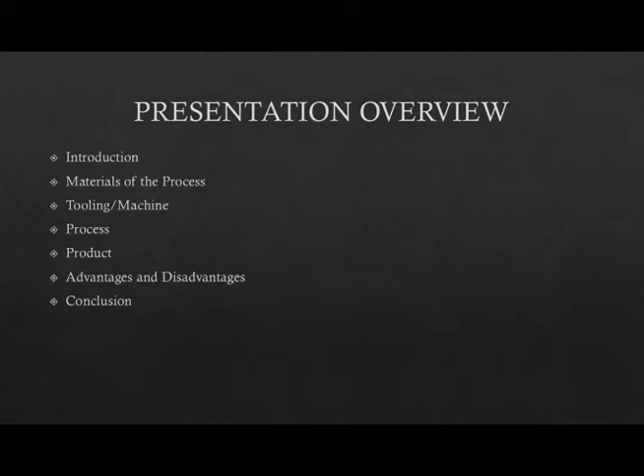So the overview of this presentation: we will start with the introduction, materials of the process, tooling or machine, process, product, advantages and disadvantages, and conclusion.

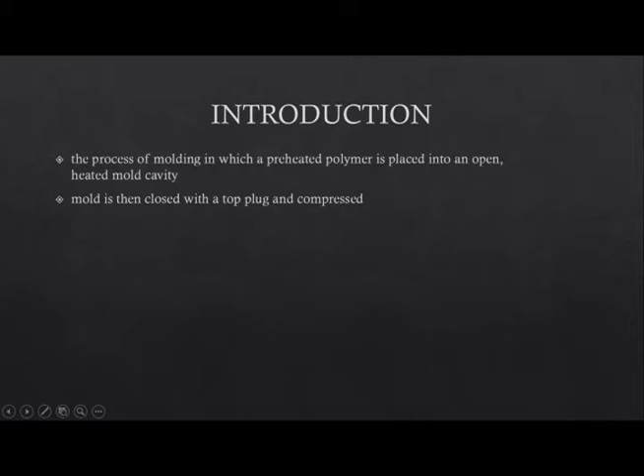Introduction. Compression molding is the process of molding in which a preheated polymer is placed into an open heated mold cavity. The mold is then closed with a top plug and compressed in order to have the material contact all areas of the mold. Compression molding is generally used for thermosetting plastics.

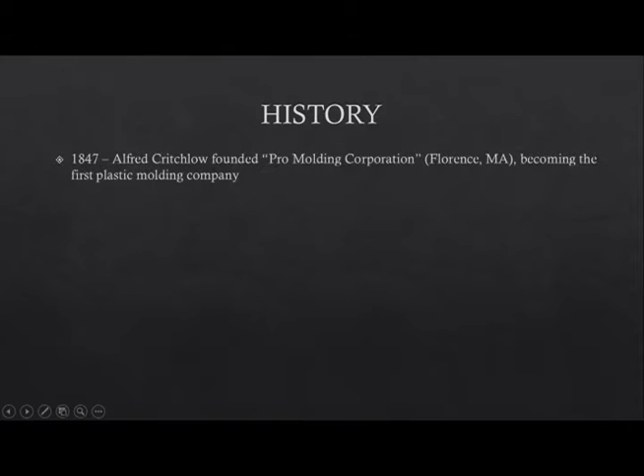Let us now discuss compression molding's history. Alfred Critchlow founded the Pro Molding Corporation in Florence, Massachusetts in 1847. Pro is thought to be the very first plastics molding company established in the United States. The very first plastic products included items such as buttons, brushes, and mirror handles that were compression molded, which are relatively small and had relatively simple geometries.

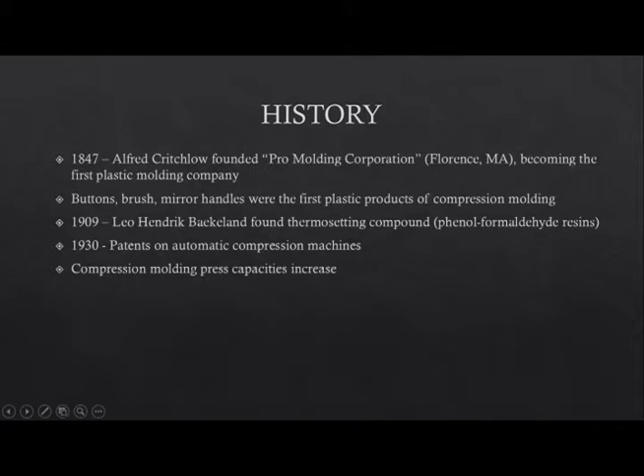In 1909, Leo Hendrik Baekeland found the thermosetting compound, the phenol formaldehyde resins. Patents on automatic compression machines date back to 1930. Over the years, compression molding press capacities or sizes increased so that larger thermoplastic and thermoset plastic parts such as radio housing could be molded.

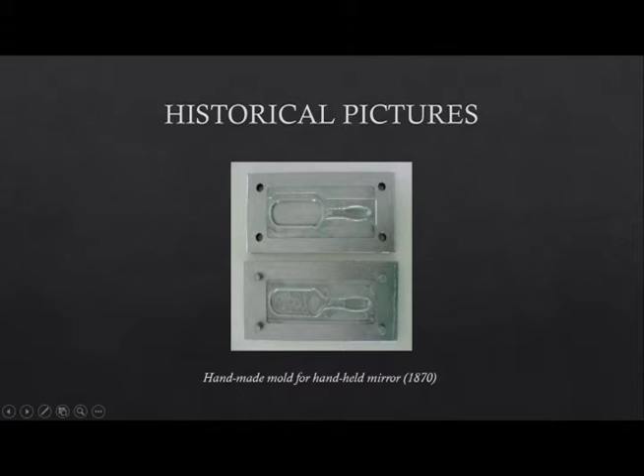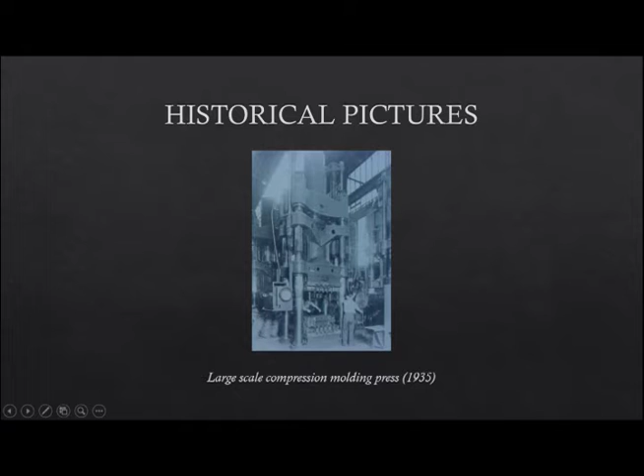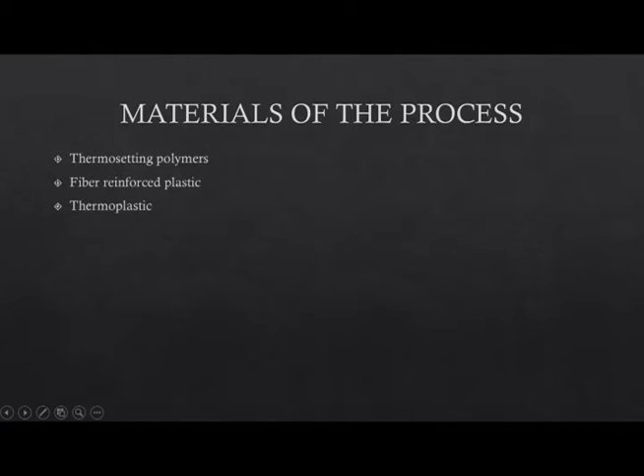What are the materials used in this process? So we have three materials: the thermosetting polymers, fiber-reinforced plastics, and the thermoplastics.

Thermosetting polymer. A thermosetting polymer, which is also known as a thermoset or thermosetting plastic, is a polymer consisting of a cross-linked structure or heavily branched molecules.

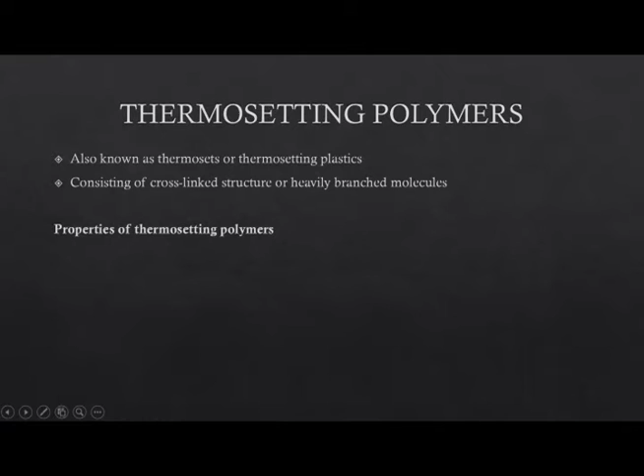The properties of thermosetting polymers. One of the main properties of thermoset plastics or polymers is that they harden during the molding process and after solidifying, they cannot be softened. Typically, when the polymers are molded and shaped, they acquire a three-dimensional cross-linked structure along with the strong covalent bonds that further help them retain their strength as well as the structure even if the temperatures are set high.

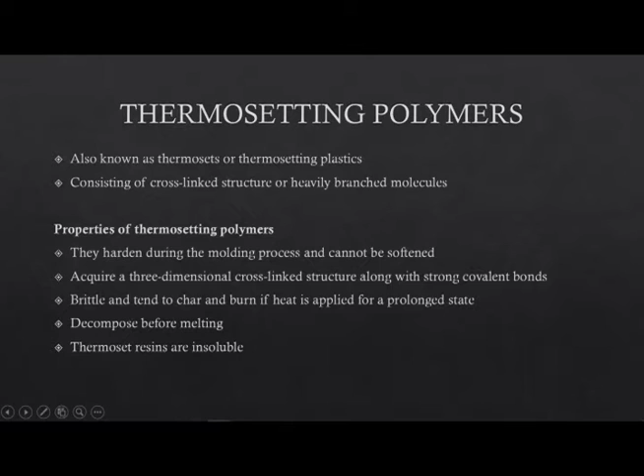However, thermoset plastics are brittle and tend to char and burn if heat is applied for a prolonged state. Normally, thermosets decompose before melting. Meanwhile, thermoset resins are insoluble in most of the inorganic solvents.

Fiber-reinforced plastic, FRP, is also known as fiber-reinforced polymer. It is a composite material made of a polymer matrix reinforced with fibers. The fibers are usually glass, carbon, basalt, or aramid, although other fibers such as paper, wood, or asbestos have sometimes been used. Properties of FRP.

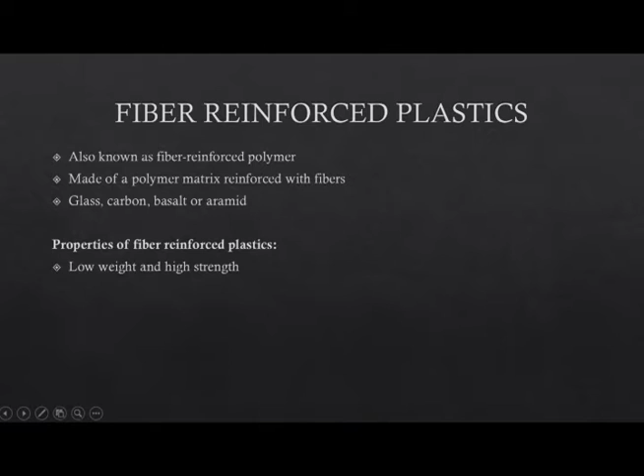These composite materials typically exhibit low weight and high strength. They are so strong that the automotive industry is increasingly interested in using them to replace some of the metal in cars. Fiber-reinforced plastics can be as strong as some metals, but they are much lighter and therefore more fuel efficient.

Fiber-reinforced polymers typically have impressive electrical and compression properties and display high-grade environmental resistance. One important factor that makes these materials a favorite among different industrial sectors is the manufacturing process, which is quite cost-effective. The rate of productivity is medium to high, and ready bonding is exhibited with similar materials.

The other exclusive properties of fiber-reinforced plastics include commendable thermal insulation, structural integrity, and fire hardness along with UV radiation stability and resistance to chemicals and other corrosive materials.

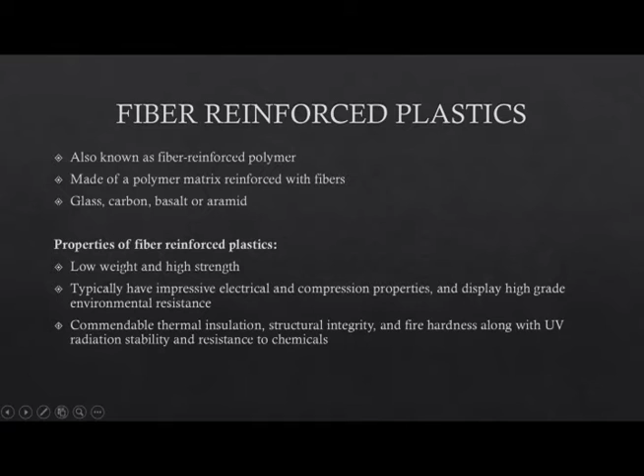The last material is the thermoplastic. A thermoplastic is a material, usually a plastic polymer, which becomes softer when heated and hard when cooled. Thermoplastic materials can be cooled and heated several times without any change in their chemical or mechanical properties.

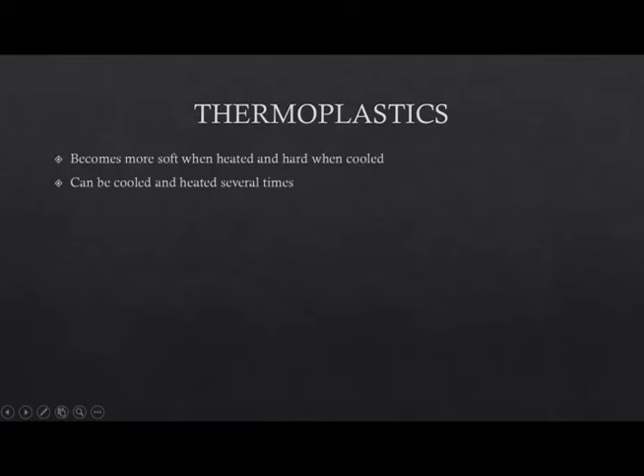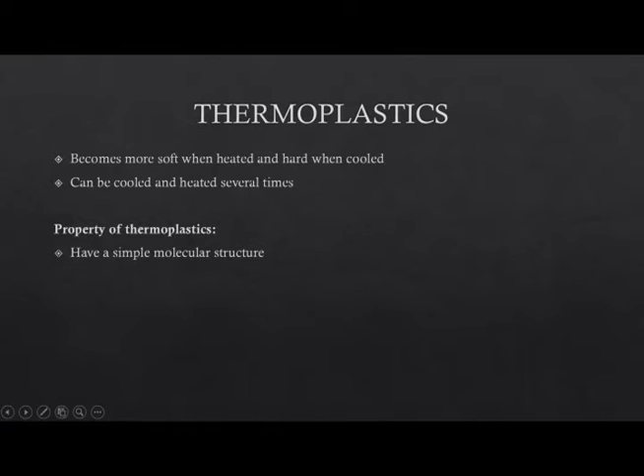This is the property of thermoplastics. Thermoplastics have a simple molecular structure comprising chemically independent macromolecules. Upon heating, they are softened or melted, then shaped, formed, welded, and solidified when cooled. Multiple cycles of heating and cooling can be repeated, allowing reprocessing and recycling.

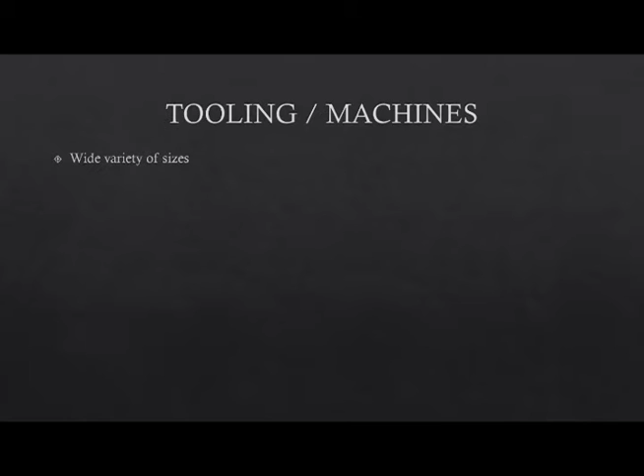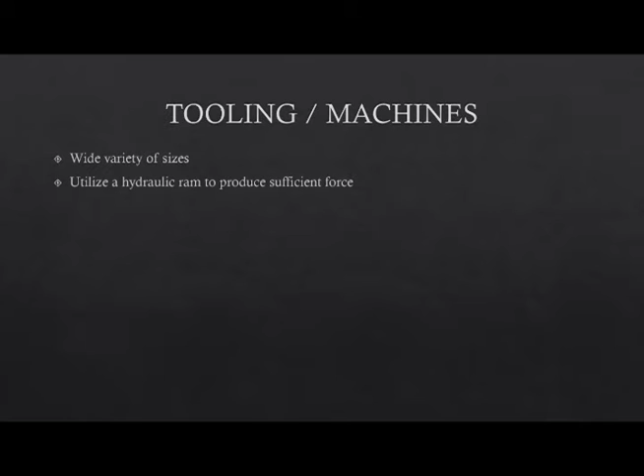Okay, let's start. First, compression mold presses are manufactured in a wide variety of sizes. Second, most presses utilize a hydraulic ram in order to produce sufficient force during the molding operation. Third, the tools consist of a male mold plunger and a female mold.

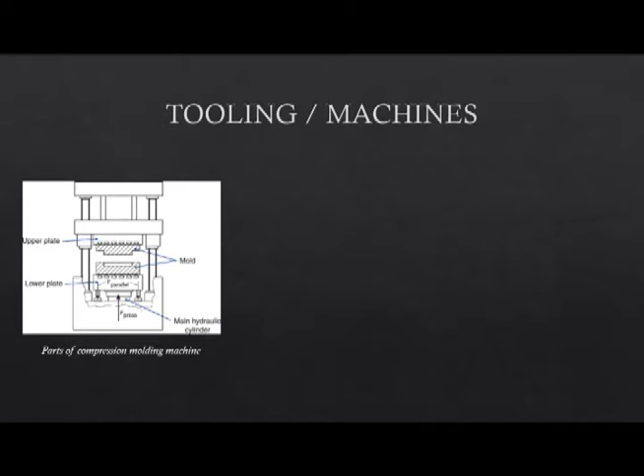This is the parts of the compression molding machine, and this is the varieties of the machine.

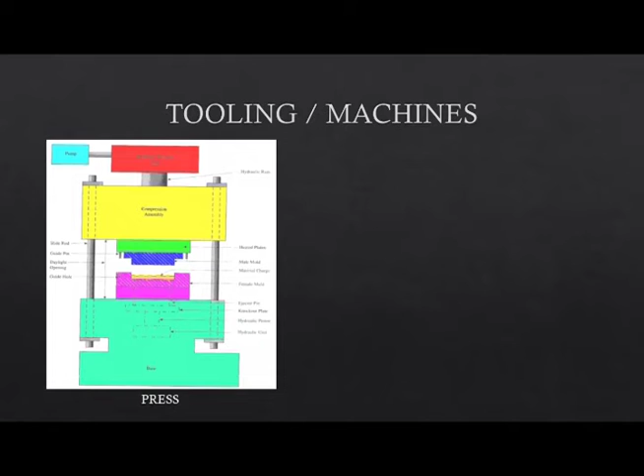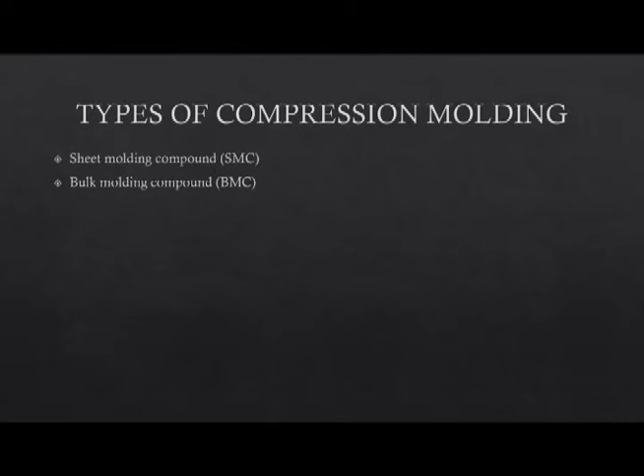This is the press, and this is the mold. There are two types of compression molding. First is the sheet molding compound, which is SMC. Second is the bulk molding compound, which is BMC.

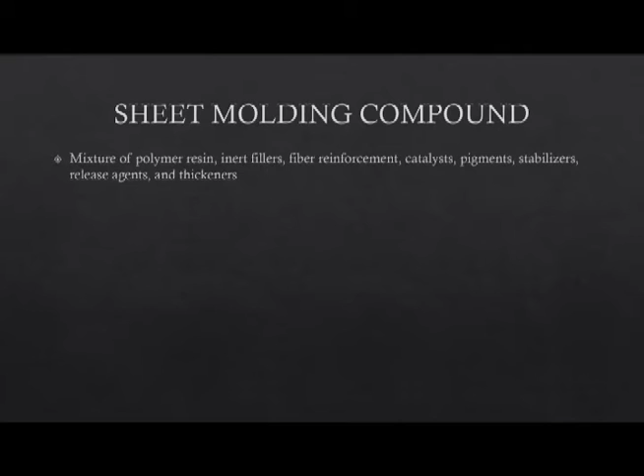Now I will explain about the sheet molding compound. As with other thermosets, SMC is a mixture of polymer resin, inert fillers, fiber reinforcement, catalyst, pigments, stabilizers, release agents, and thickeners. Manufacturing of SMC is a continuous inline process. This is an example of the SMC manufacturing process, as the figure shows.

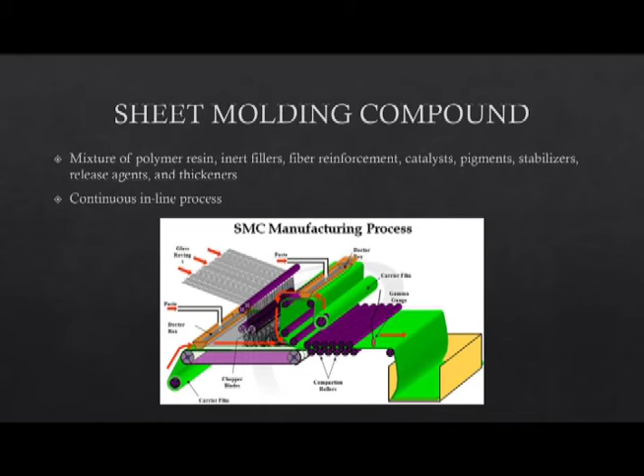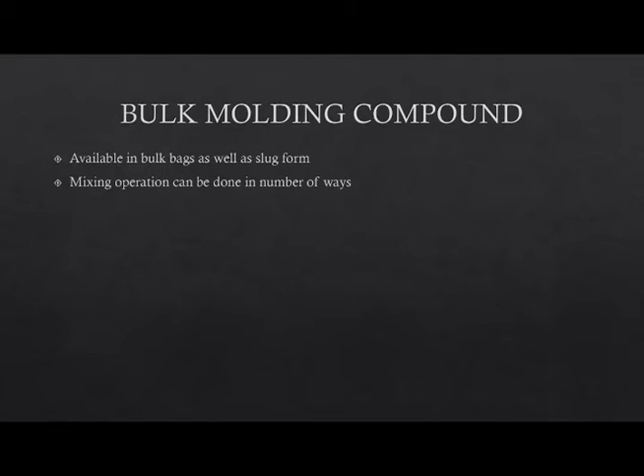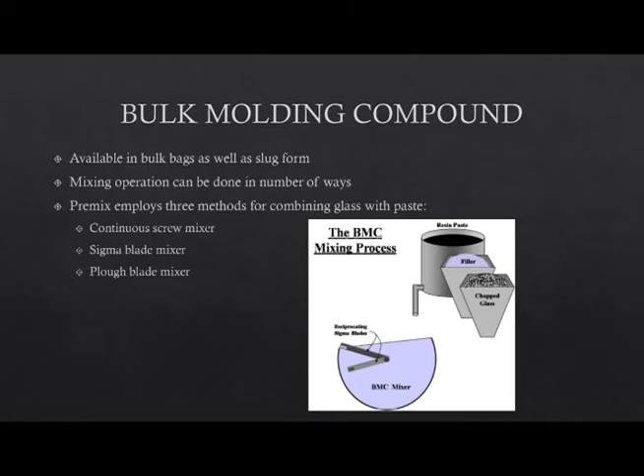Second, bulk molding compound. BMC is available in bulk bags as well as slug form. The mixing operation can be done in a number of ways. Premix employs three methods for combining glass with paste: first is the continuous screw mixer, second is a sigma blade mixer and a plough blade mixer. The figure shows this. Next is the process.

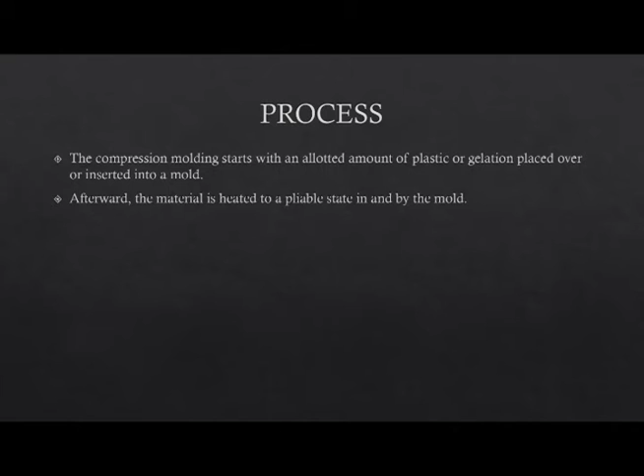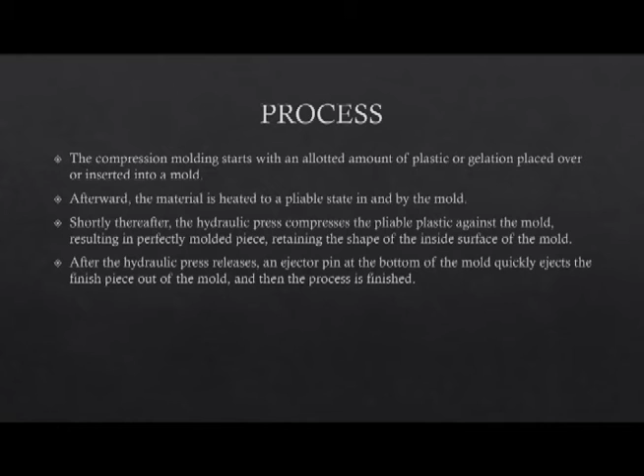Compression molding starts with an allotted amount of plastic or gelation placed over or inserted into a mold. Afterwards, the material is heated to a pliable state by the mold. Shortly thereafter, the hydraulic press compresses the pliable plastic against the mold, resulting in a perfectly molded piece, retaining the shape of the inside surface of the mold. After the hydraulic press releases, an ejector pin at the bottom of the mold quickly ejects the finished piece out of the mold, and then the process is finished.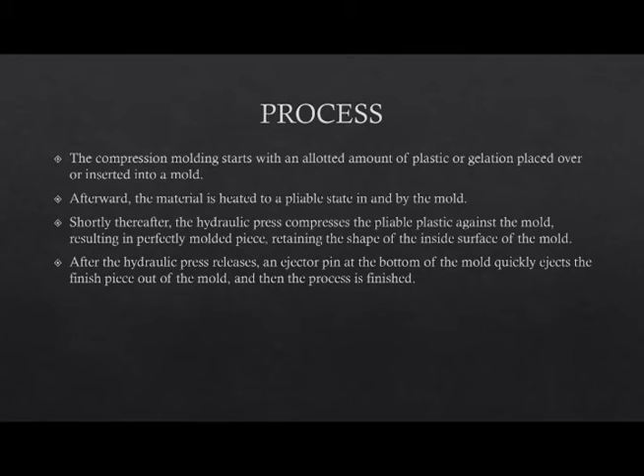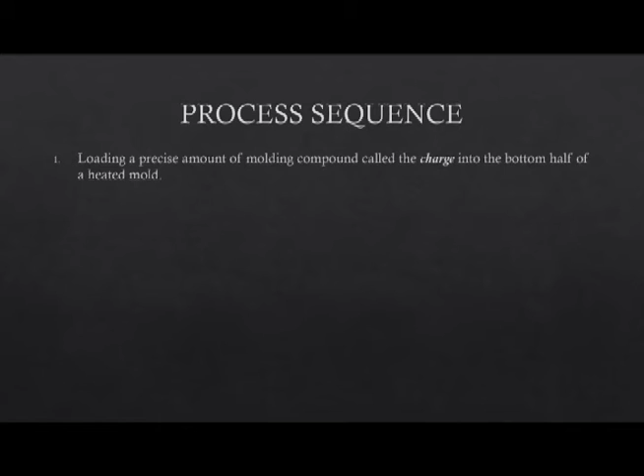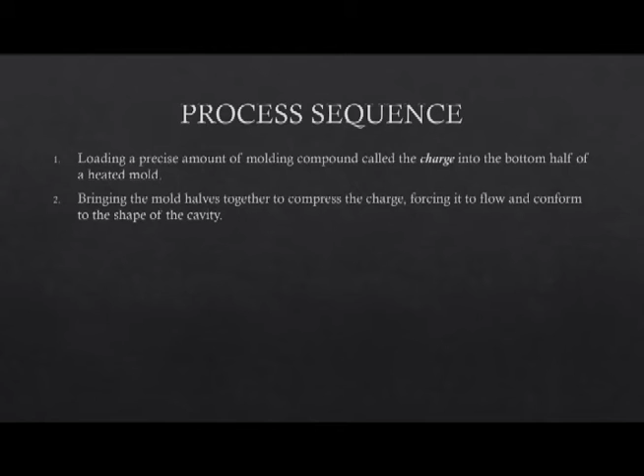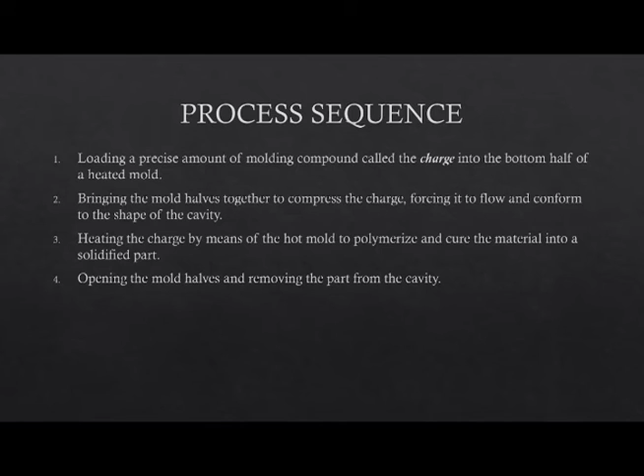Process sequence: loading a precise amount of molding compound, called the charge, into the bottom half of a heated mold. Second, bringing the mold halves together to compress the charge, forcing it to flow and conform to the shape of the cavity. Heating the charge by means of the hot mold to polymerize and cure the material into a solidified part. Opening the mold halves and removing the part from the cavity. This is the exact presentation of the process.

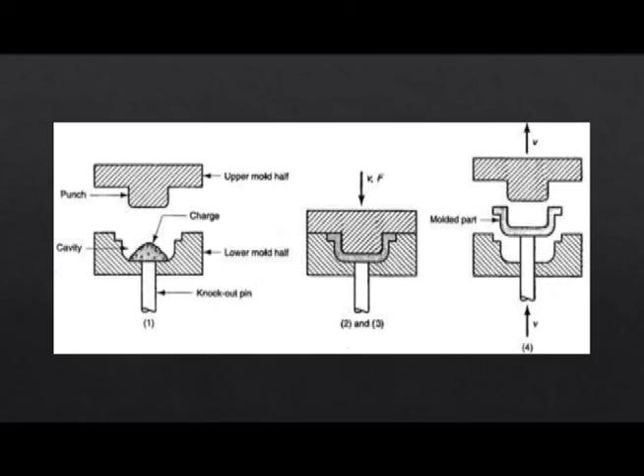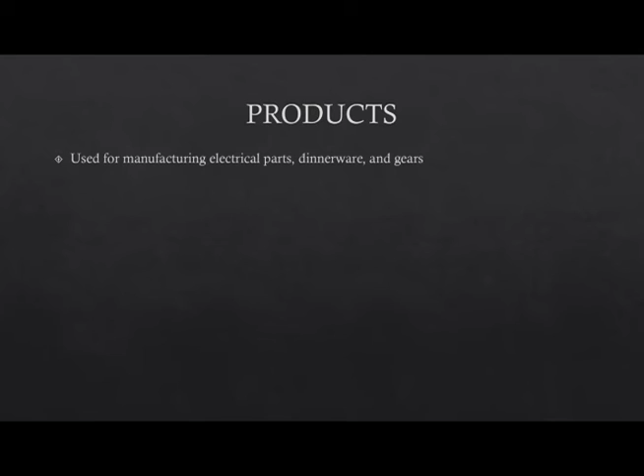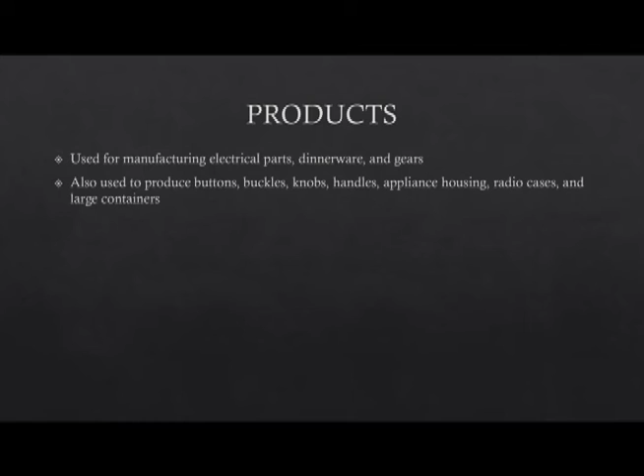Now for the products, compression molding is used for manufacturing electrical parts, dinnerware, and gears. It's also used to produce buttons, buckles, knobs, handles, appliance housing, radio cases, and large containers. It's also used for several more applications.

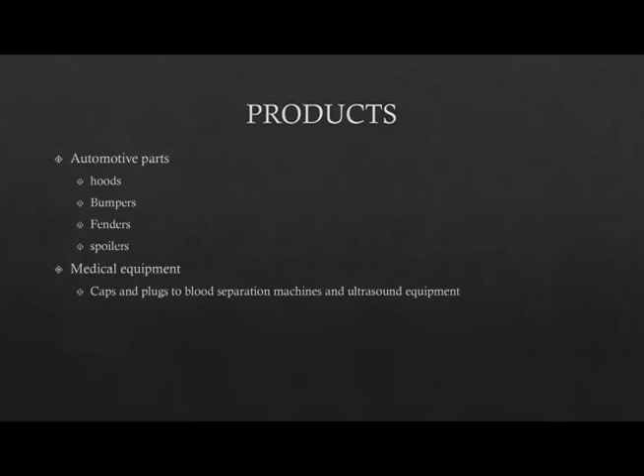In automotive parts, it's used to make hoods, bumpers, fenders, and spoilers. In the medical field, it is used to make caps and plugs for blood separation machines and ultrasound equipment. For aerospace, compression molding is used to make electrical connectors to guided missiles.

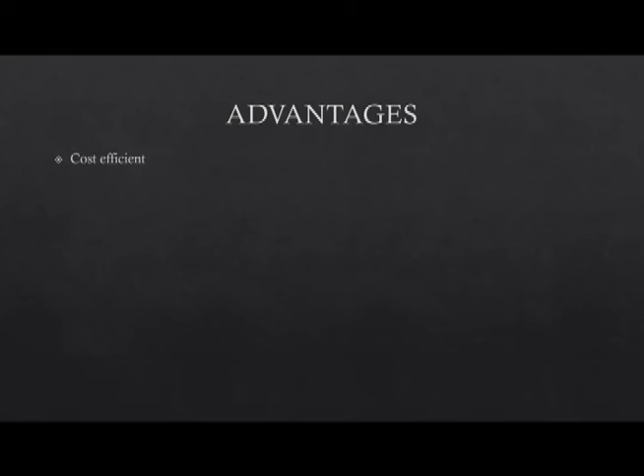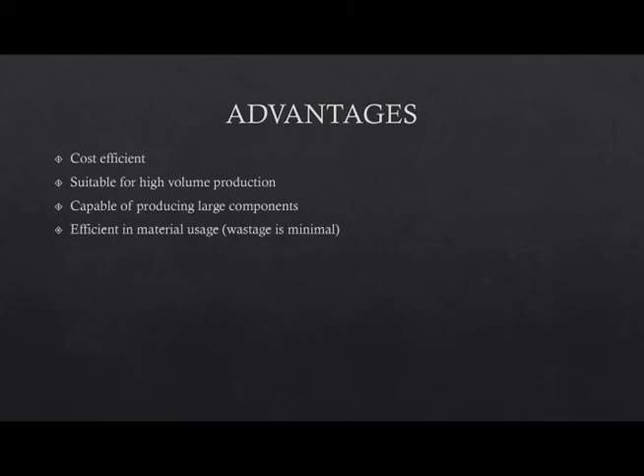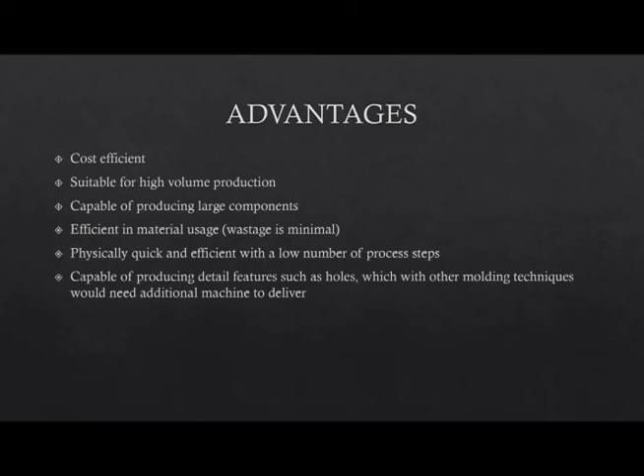Now for the advantages of compression molding: first, it is cost efficient, and it is also suitable for high volume production. Compression molding is capable of producing large components and is efficient in material usage, meaning waste material is very minimal. The process is physically quick and efficient with a low number of process steps. It is also capable of producing detailed features such as holes, which with other molding techniques would need additional machining to deliver.

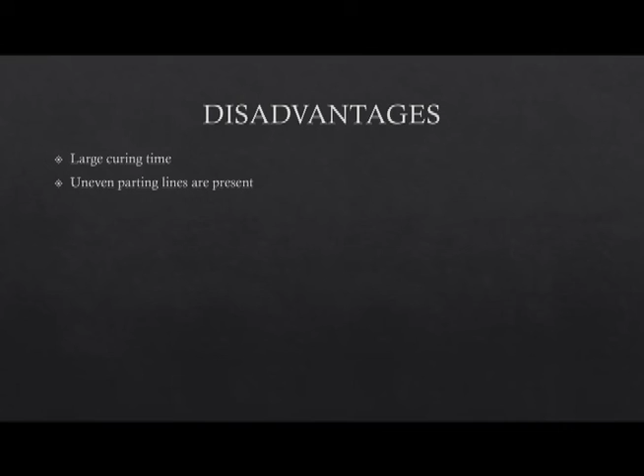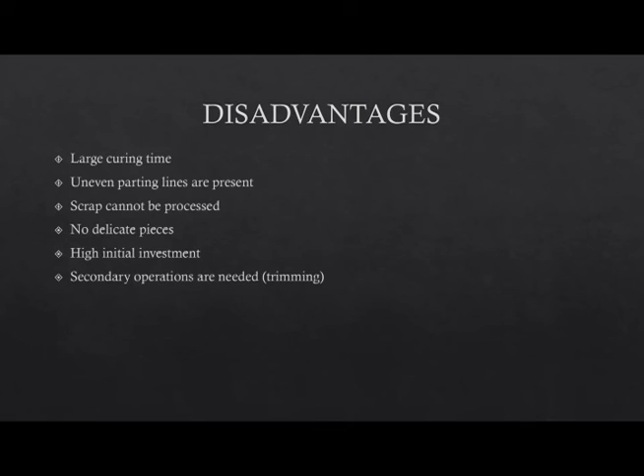For the disadvantages, the first one is that it requires a large curing time. Present also are uneven parting lines, and the scrap materials cannot be processed again. There are no delicate pieces possible, and it requires high initial investment. Also, secondary operations are needed after the molding, like trimming. The mold depth is limited, and there would be product inconsistencies.

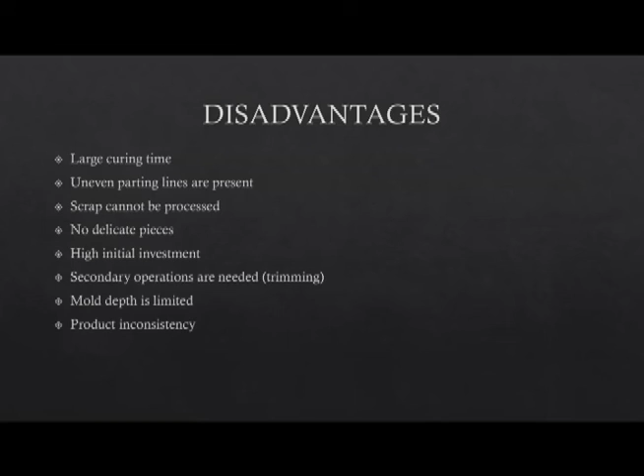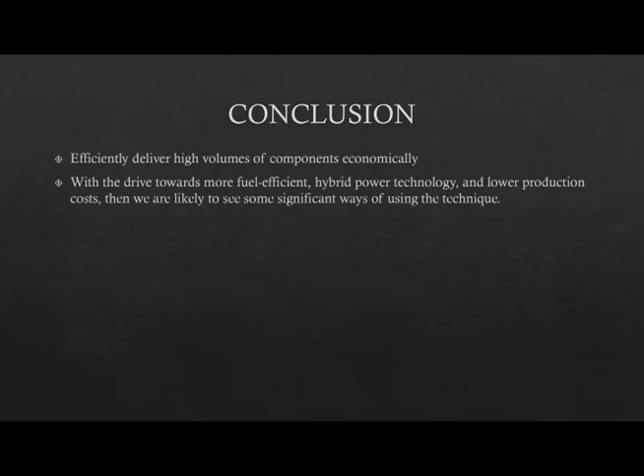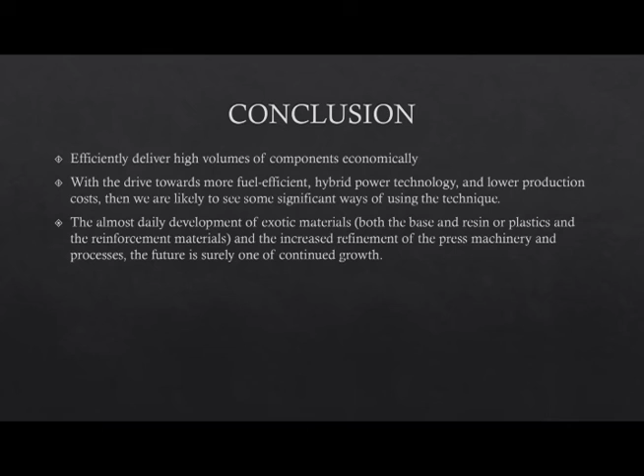In conclusion, compression molding efficiently delivers high volumes of components economically. With the drive towards more fuel-efficient hybrid power technology and lower production costs, we are likely to see some significant ways of using the technique. The almost daily development of exotic materials and the increased refinement of the press machinery and processes means the future is surely one of continued growth. That would be the end of our presentation.